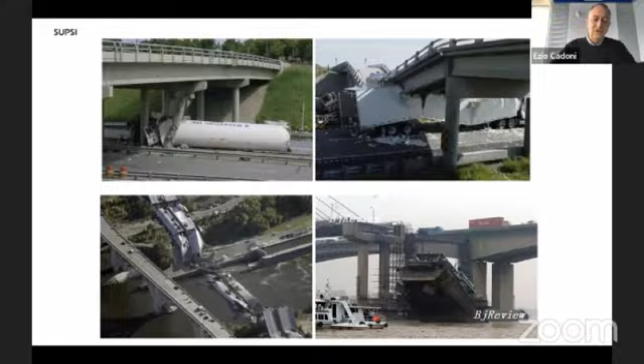In the frame of a multi-year research project named Protection of Infrastructure Elements from the Effects of Improvised Explosive Devices and Blast Charges, that is supported by armasuisse Science and Technology of the Swiss Federal Department of Defence, Civil Protection and Sport, we have carried out extensive numerical and experimental research.

This research was subdivided in three parts: the material characterization, developed at the DynaMat laboratory, numerical simulation of UHPC plates under blast loading, and the blast tests of these UHPC plates carried out at the detonics laboratory near Spiez in the German-speaking part of Switzerland.

The research was aimed to study the retrofitting system using ultra-high performance fiber reinforced concrete, and different sandwich plates were tested dynamically using C4 charges in contact and at standoff distances of 3 and 6 centimeters.

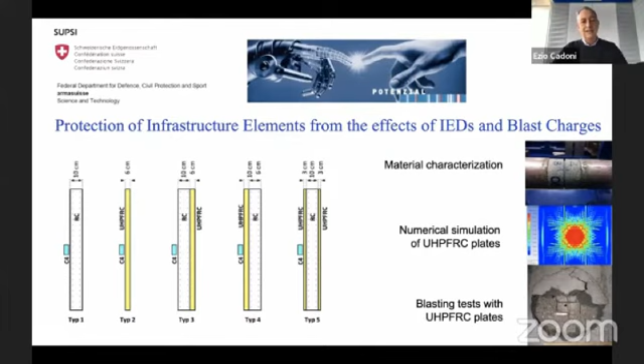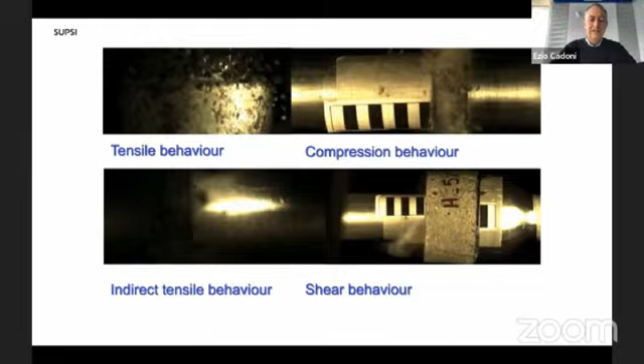The mechanical characterization at high strain rate was performed in different loading modes, such as the direct tensile test, compression, indirect tensile test, and shear, using samples having different shapes, sizes, notches, and so on. We have analyzed several commercial UHPCs having different fiber contents with different aspect ratios of high carbon steel fibers.

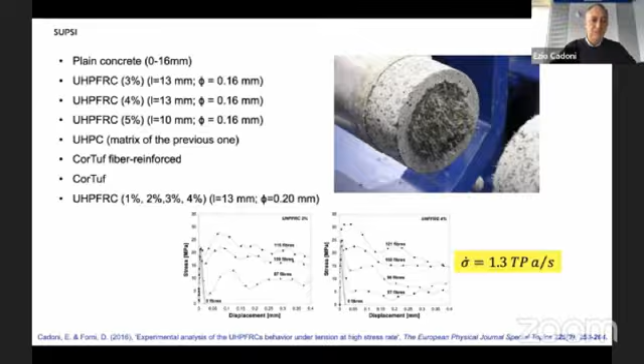And I'm going to present some results on the high strain rate behavior of UHPFRC in compression. To perform this study, a new apparatus was used, designed to analyze the triaxial behavior of quasi-brittle materials, such as rocks and concrete, under dynamic loading. This machine is currently under construction and was partially funded by the Swiss National Science Foundation.

It consists of 3 pairs of bars in 3 perpendicular directions, and a pulse generator that is a pretension bar in this position. The pretension bar is pulled by means of a hydraulic actuator of 4 meganewtons, and the brittle bolt that is placed in between activates the test with its rupture.

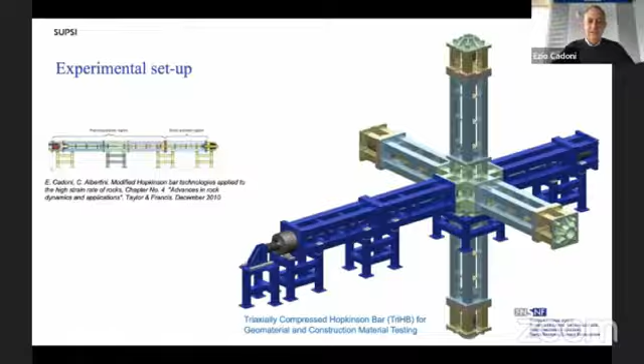The input bar is the solid continuation of the pretension bar, and the other 5 bars can be considered as the output bars. At the end of each of these 5 bars there are another 5 hydraulic actuators that permit imposing the triaxial state. All the bars are instrumented with strain gauges in order to record the wave propagation in the system.

The results I'm presenting were obtained by using only the monoaxial configuration, the actual configuration, where the specimen is pre-strained before the dynamic test. The imposed pre-strains were one-third and two-thirds of the quasi-static strength. Dynamic tests were carried out at the same velocity by imposing 500 kilonewtons in the pretension bar, giving a stress rate of 1.6 terapascal per second.

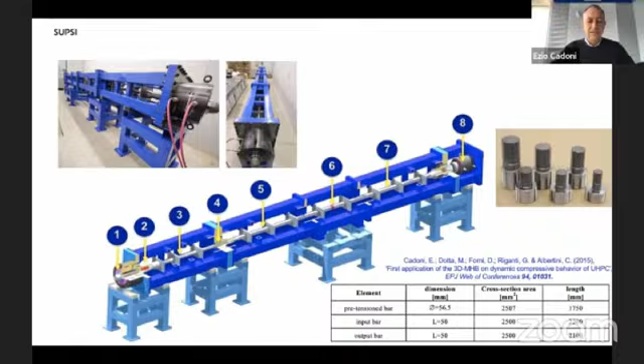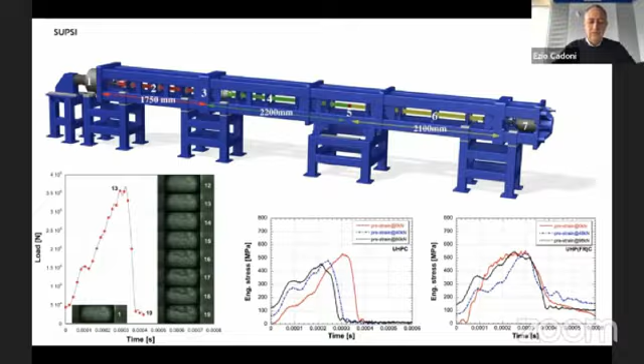Activated cracks and the stress rate play a crucial role in nucleating the cracking process that results in specimen failure. The material had a more uniform response in tests with higher static preloading values, but its strength was lower, caused by the quasi-static loading in the case of UHPC, while the fiber-reinforced material does not present significant differences.

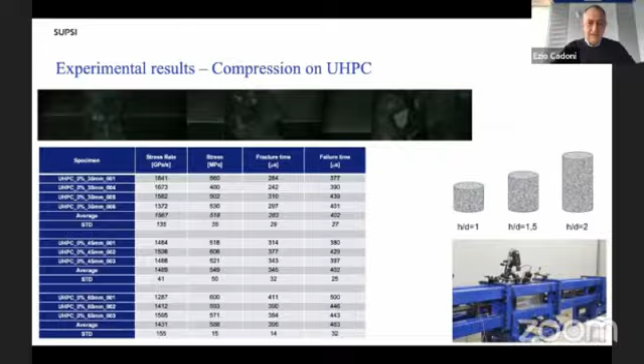In the next two slides, I'm presenting the results of the two materials with the same preloading conditions. These are the results for the matrix, the UHPC, in which this is the evolution of cracks, and this is an example of the fiber reinforced material.

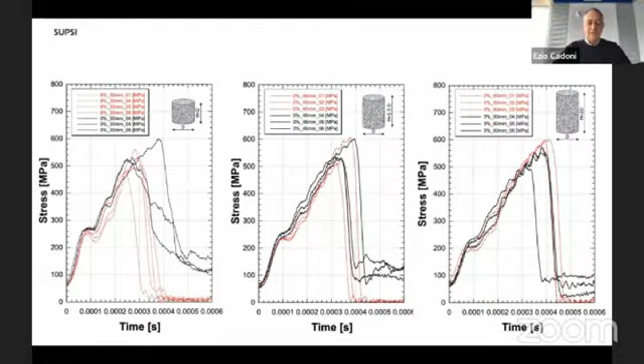In this slide, I've shown the comparison between the two materials, matrix and fiber reinforced, in terms of experimental stress-time curves. The peak load seems not to be influenced by the presence of the fibers, while the post-peak is governed by the fiber content, and this influence decreases with increasing specimen length. We have observed that by increasing the stress rate, the shear failure occurs at a higher stress rate.

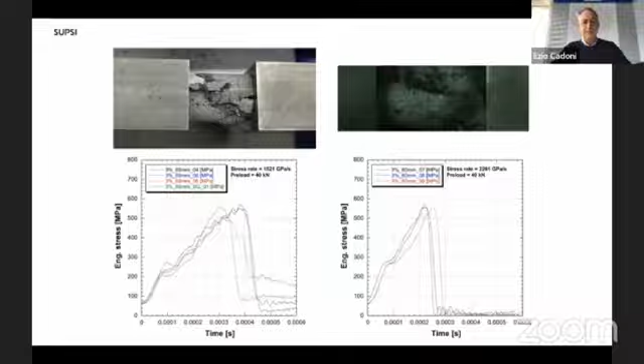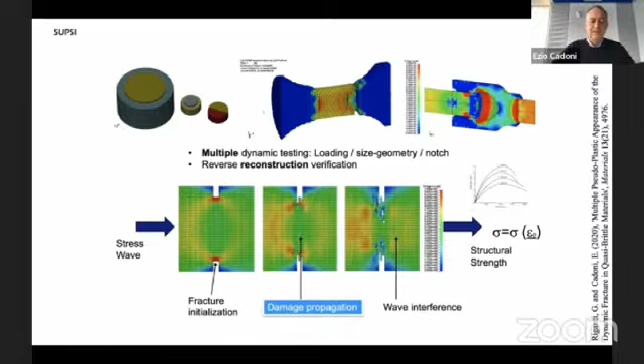Thanks to the results of more than 400 dynamic tests on samples with different sizes, shapes, and notch geometries under different failure modes, a new model was developed. This material model is named DAMP, Damage Propagation Model, where the damage interferes with the wave propagation, and we have considered this phenomena.

This slide depicts the damage evolution of the two materials, with the color indicating one for fully damaged and 0 for intact material. And this shows the good suitability of the DAMP model in reproducing our tests.

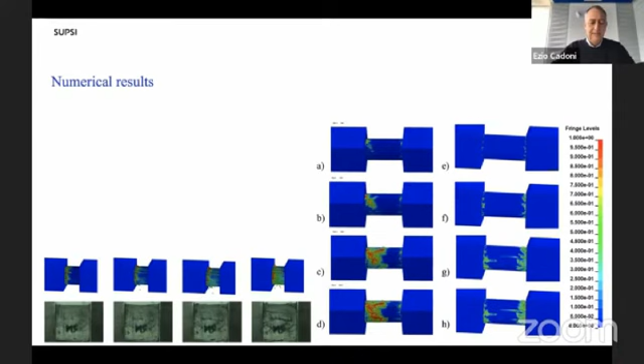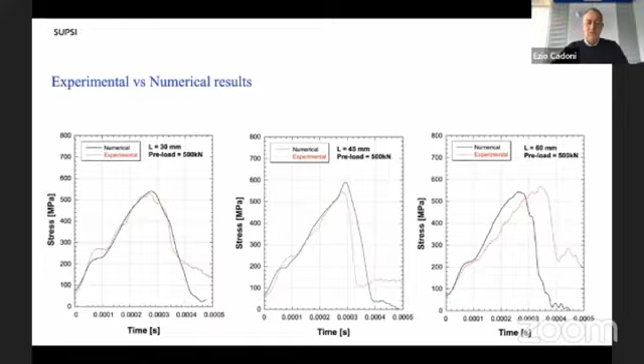Here is the comparison between the stress versus time curves obtained experimentally and numerically for the 3 sample dimensions. The good agreement between the experimental and numerical results is due to the fact that the DAMP material model evaluates the interaction between damage propagation, loading wave, and specimen size.

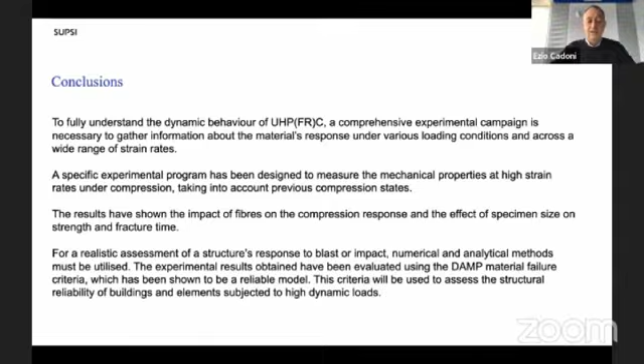To conclude, to fully understand the dynamic behavior of this material, a comprehensive experimental campaign is necessary to gather information about the material response under various loading conditions and across a wide range of strain rates. For a realistic assessment of structural response under blast or impact, numerical and analytical methods must be utilized.